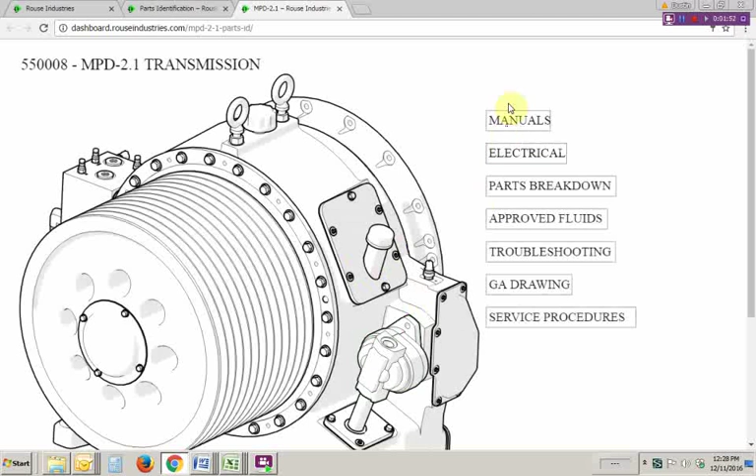You're going to click on it, you're going to come in, and it's going to have a list of items that you need to know. We've got the manuals here. We have electrical breakdown here, parts identification breakdown, and approved fluids, as well as some other stuff.

A lot of the questions I get is, what oil do we use with these things? Really simple, we got one oil that we approve. It's the only oil that we found that accomplishes all of our goals. It's the CAT TDTO TMS oil. It reduces the hydraulic drag at low temperatures. It still has good shielding characteristics at high temperatures. This is the only oil that you're going to get from us that we will stand behind and approve.

If you want to use something else, use it at your own discretion, at your own risk, and understand that a lot of the problems you may have will be as a result of the oil.

This can be purchased from any CAT store, as well as from Southern Industrial or Rigworks if you're in Alberta. We have it in 20-liter pails, so it's nice and convenient. If you are somewhere a little bit more remote in northern Alberta or out in Manitoba, any CAT store, any CAT rental store, Finning, Toromont, previously Kramer, all carry this stuff and it can be purchased pretty much everywhere.

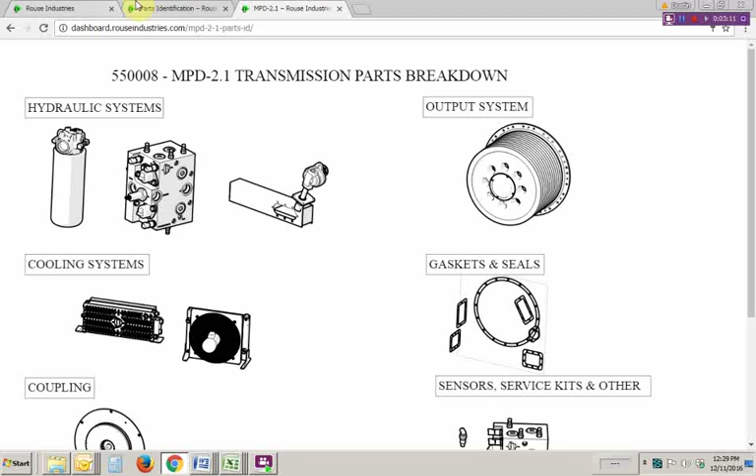Parts breakdown. So we're going to click in here and you're going to get a breakdown of all the different subsystems on the unit. Now, for the most part, everybody wants to know about the hydraulic circuit.

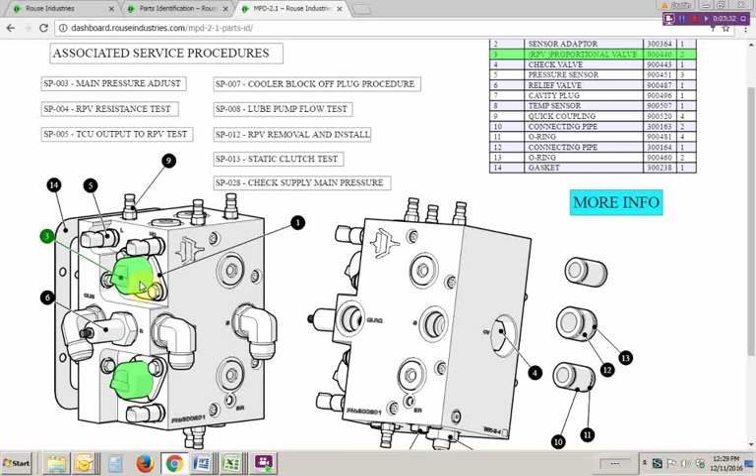So you click on the hydraulic manifold there and you have the drill down. You have the interactive bill of materials off to the right hand side. You're going to be able to scroll over and see what items you're looking at. Lots of people looking at pressure sensors, at relief valves, the RPV engagement valves. All this stuff can be identified right here. This is the part number and this is the item.

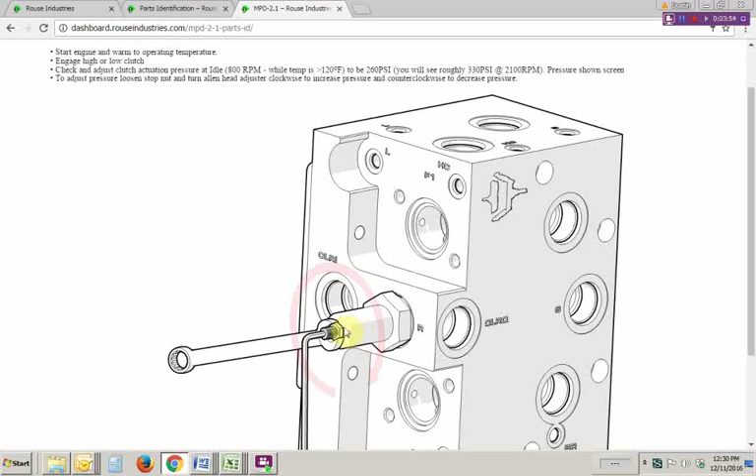We have the associated service procedures for the manifold here as well. So when you're adjusting your main pressure to be ready to go to work, this is the link you would click. As you can see, it's just got a simple description of what you need to do and how you need to do it.

Clicking back, we also have this little more info tab, which is going to be important for a lot of you. You're going to click it. It helps identify what sensor and what valve is for what circuit, as well as which test ports test those circuits. When you're phoning us and you need help over the phone to either diagnose a problem or walk through an issue you're having, it's important that you know what items do what.

So when we're asking you to check your lube circuit port or your high clutch test port, you're clicking on the right thing. The next page down, same thing, it just has the operating parameters of each one of those items. So there's the resistance of the engagement valve. We have the operating pressure of the lube test port or the lube circuit. We have the pressure you want to have your unit set at idle, at temperature.

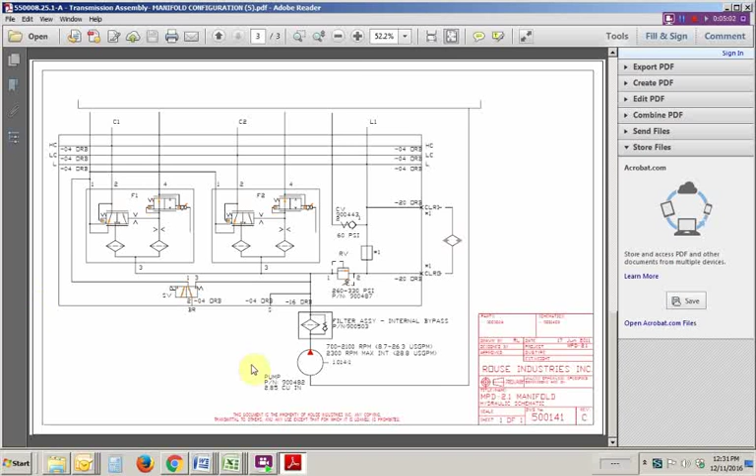So all this information is here. On the last page you get a simple hydraulic circuit schematic, which is less applicable to you guys, but definitely this range and parameters, as well as the warnings, shutdown schedules, and item identification, is really important.

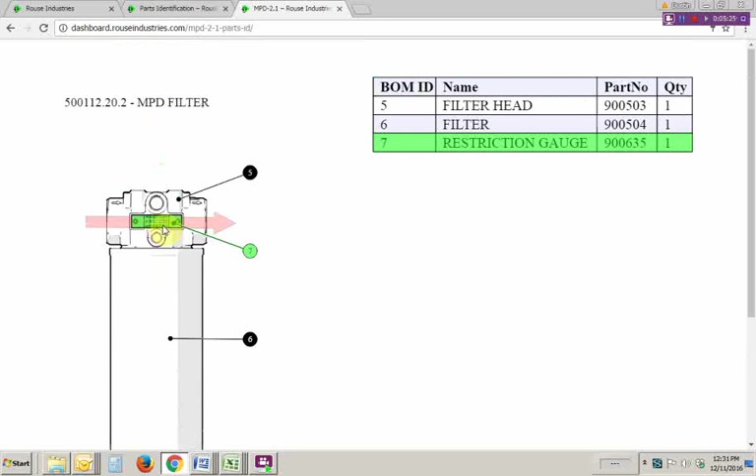We're going to back up. We've got filters, your filter option - notice these filter heads are directional. Be aware of that in the event that you break one and need to replace it. They have been put on backwards by people in the past.

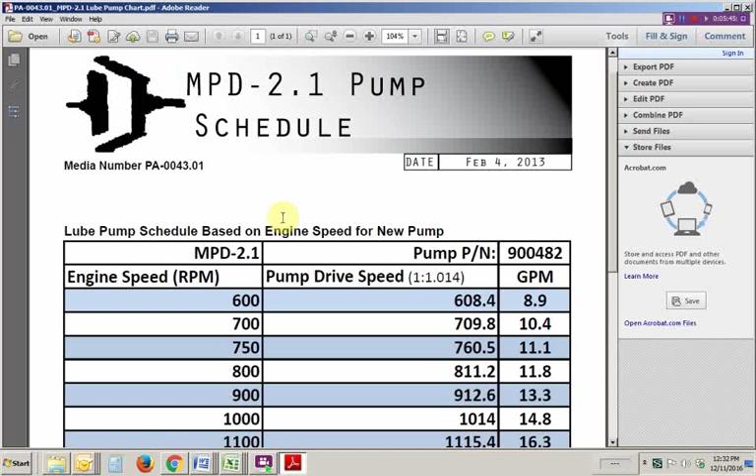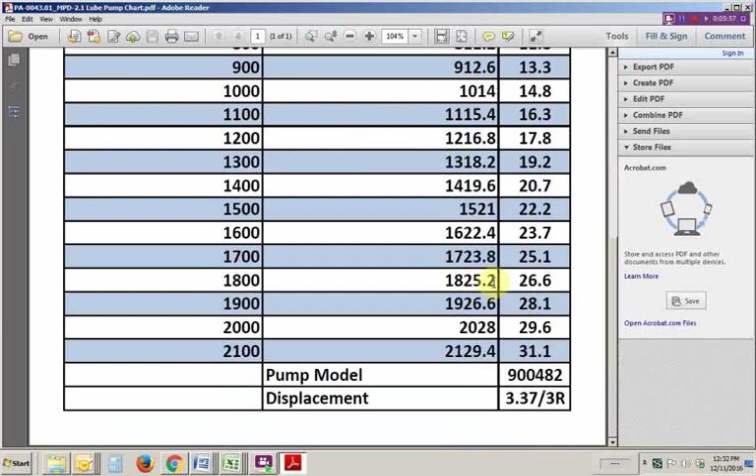Lube pump - all this information for the coupling, for the seals, all that stuff is right here. The lubrication schedule is here for the unit as well, so if you're ever questioning the lube pump and you get a flow meter on there, you can see your engine speeds listed. This should be your pump speed, and therefore the GPM of fluid you have running through that pump. If you're ever questioning your pump, that's what you can check it against.

Cooling systems - some of you have AC coolers, some of you have 24 volt E-fan coolers, depending on the cooler group you have. You can click on it, get a little bit more information, as well as see the cooler circuit.

A lot of times, especially with the AC cooler options, we get guys phoning and asking why isn't my cooler turning on. A lot of times that has to do with this part of the equation, which is actually the high voltage side.

So from the Rouse Industries point of view, we have this 12-pin Deutsch connector in the harness. The electrical group, whatever electrical group was used when the rig was put together, will have taken that output signal that we have here, brought it into a relay to close your contactor for cooler. If you don't have a cooler functioning, it's more than likely this relay that's giving you grief, and there's ways to test that.

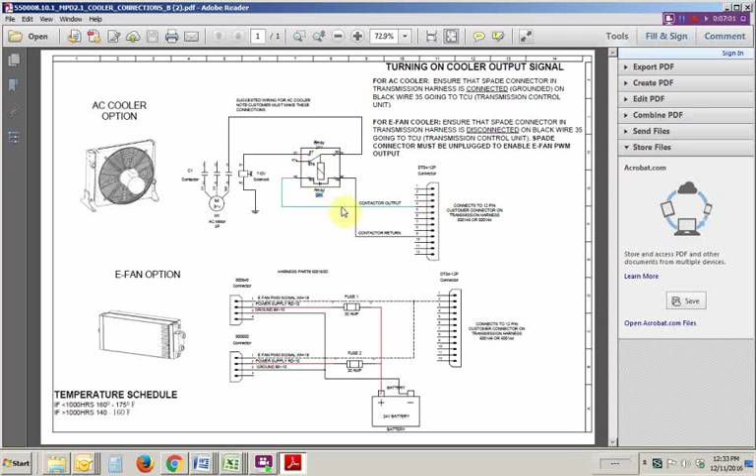Coupling, gaskets, rear seal, components - all of that's right here and available for you.

I'm going to go back to this main page. We have procedures and protocols. You click on that, you'll see a whole bunch of different service procedures for doing a bunch of different items.

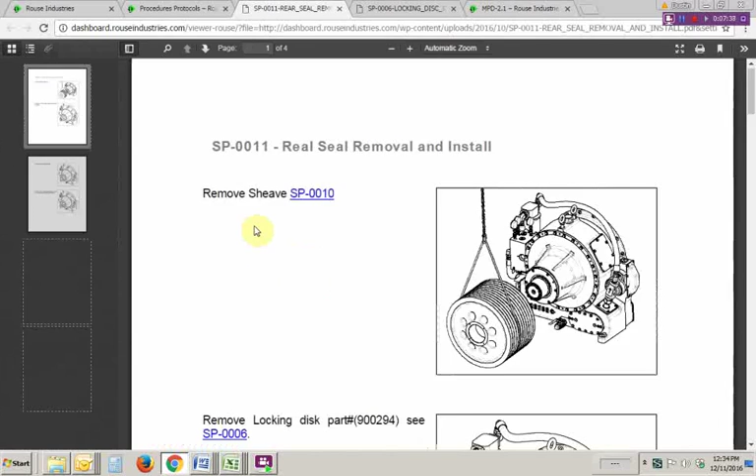We have locking disc removal and install, so that's the locking disc for taking the sheave off the back of the output shaft. We got static clutch tests, we have rear seal removal install. As you can see, these are all just step-by-step instructions on how to do the different things you may need to do on your unit.

Troubleshooting - this is dedicated to the MPD2 again, or MPD 2.1. Again, that is the most common unit we have out there, and it's the one with a little bit more complicated system. So this is the troubleshooting information.

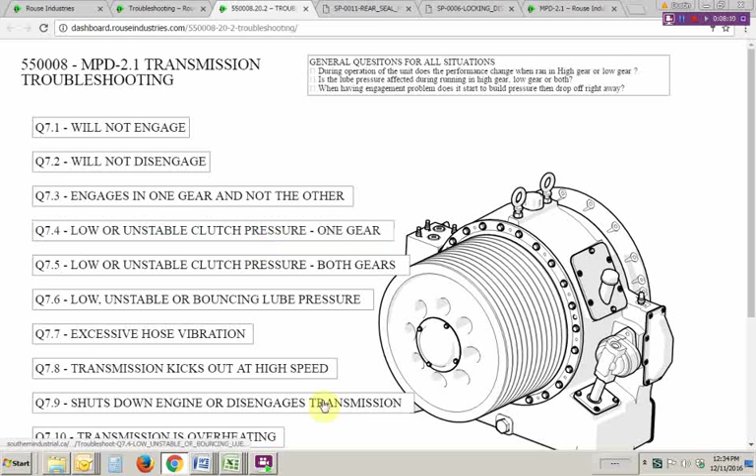These are your symptoms. If you have one of these symptoms, click your link, follow the steps through. Make sure you have your information available so that if you need to call us, you have a lot of these items already checked and ready to give us for information so we can actually help you. A lot of times we have people phone, they haven't really done anything yet, they don't know anything. It just makes the process very slow to walk them through getting help.

Customer manuals - if you don't have your manual at the rig, because maybe you weren't the push on this rig last time, this is where you can find it. As you'll notice, there's some different manuals depending on the engine type. That's more about the different associated control systems.

We got screen navigation, we got service manuals for MPD1, MPD 2.0, as well as all the 2.1s. We got the iScreen, or IQAN screen navigation manual - that's the smaller screen, depending on the hydraulics group type you have, or controls group type, I'm sorry. And then just a simple warranty statement, similar to any of the engine manufacturers, just a statement about warranty.

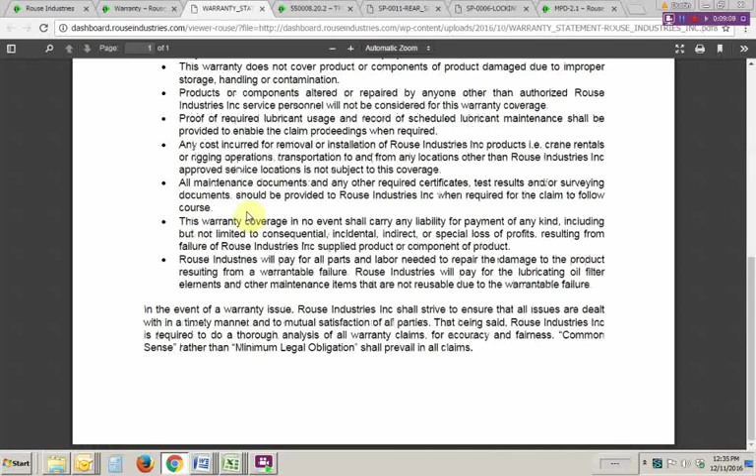So that is the gist of it. This is where you need to get your information from. If you don't have access to these sites, please get a hold of us at Rouse Industries. You can ask for Dustin - he will get you a password, he will get you a user login, and if you're having any troubles with that, just get a hold of us. Thank you.